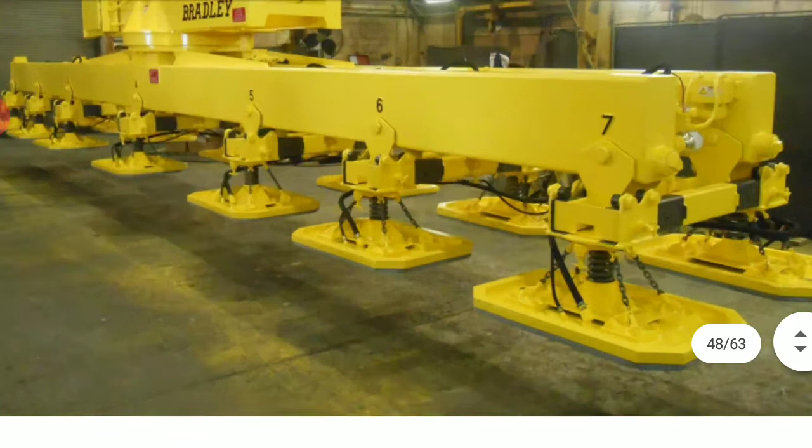So this vacuum lifting pads - these vacuum lifters are a type of lifting equipment that incorporate a vacuum as part of the lifting mechanism. They consist of, below the hook, a certain frame with a large vacuum pad. Here you can see the different pad-like systems - these particular pads come with vacuum pressures, consisting of a below-the-hook frame, including the hook part also.

And here several smaller suction cups can be seen - these suction cups are for grabbing large sheets, rolls, plates or other smooth surfaced products. This can be easily lifted up using these particular pads to the structural members. This vacuum lifting pad can be used especially in lifting structural elements.

This is part of the introduction - vacuum lift is nothing but a technique that lifts and places material with a vacuum suction head. Just by using this vacuum suction head, we can lift and place structural elements from one place to another.

This suction head is placed over a material that is to be lifted, and the vacuum pump creates a vacuum, so the material gets stuck to the vacuum head, which can then be lifted by conventional means like hoists, rams and cranes, etc.

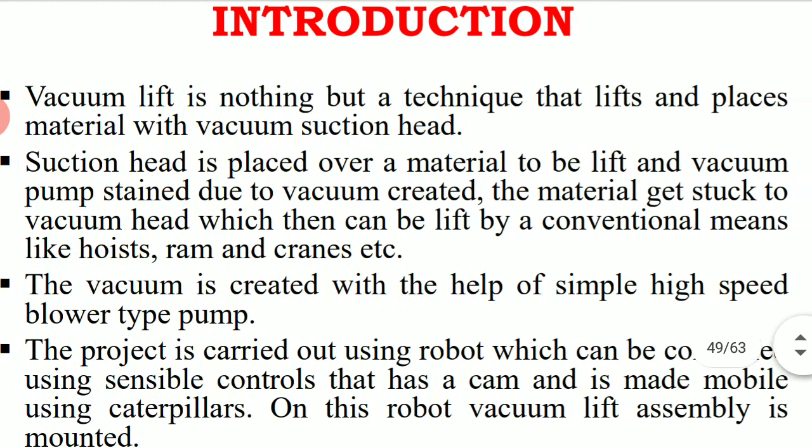The project is carried out by using a robot, which can be controlled using sensible controls, that has a cam and is made mobile using the caterpillar. Using all this, which works under a digitalization process, each and everything can be monitored just by sitting at one place. Each and every work can be done with the help of a remote system.

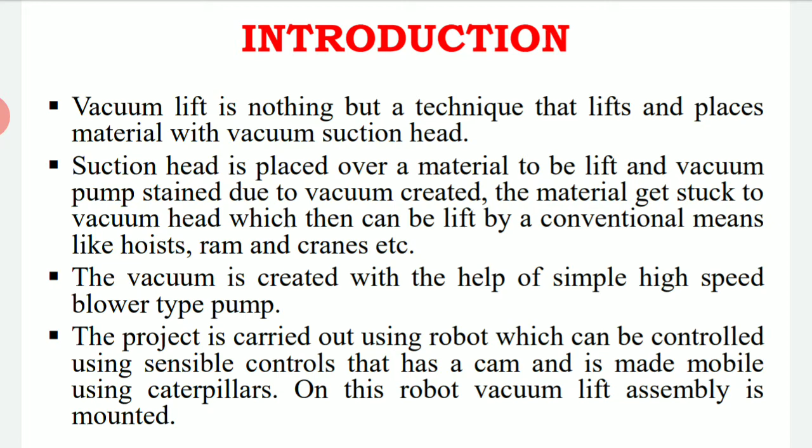What are the main uses of this vacuum lifting pad? This vacuum lifting equipment can be designed to lift, hold, turn, tilt or rotate. It has all these functions in its movement - it can lift and hold a certain element, turn it from 0 degree to 360 degree, tilt it in upward and downward motions with respect to the angle of deviation, and even rotate it from one place to another. That's the main use of this vacuum lifting equipment.

So almost anything can be handled, such as steel, glass, concrete, plastic, wood, aluminum, pipes, refrigerators, aircraft sections, drums, cartons, round shaped profiled objects - all can be handled. So many members can be handled using these vacuum lifting pads, such as steel, glass.

So basically the main limitation of this particular vacuum lifting pad is it should consist of a smooth surface, so that the entire pressure generated from that vacuum head is going to stick with that plain material, I mean plain members, so that it can easily stick to that member and it can be lifted from one place to another place.

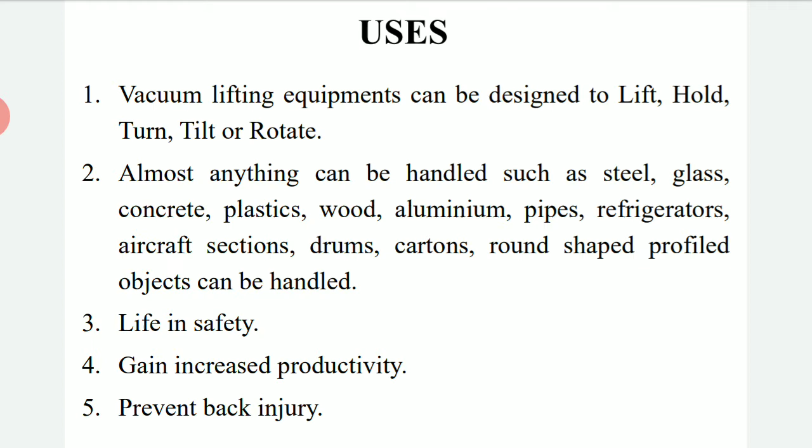And it gains increased productivity, so that work can be completed in an earlier time with a lesser amount of energy, so the productivity is always going to be increased in its section. And then it prevents back injury. So back injury in the sense that a person who is going to work that machine, that is the vacuum lifting pads, even that can prevent the back injury also.

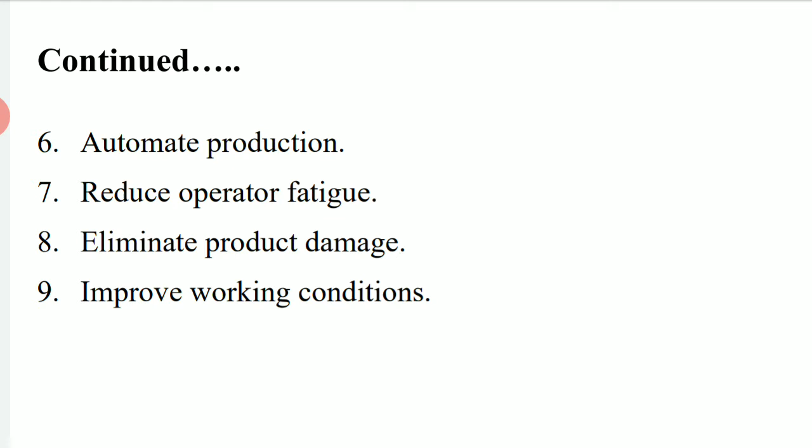And this is automated production, so everything works with a remote control system only, so no additional energy, I mean human energy, is utilized on those members, and it reduces operator fatigue. So in some cases, such as cranes, a certain operator will be there, and just by his operation modes it can be moved from one place to another place. The same thing can be minimized in the vacuum lifting system, and that eliminates product damage and it improves the working conditions. So these are the advantages.

So less ground personnel are required, reducing the risk of accidents. So here only a single person is enough to transfer from one place to another place, whereas in crane systems the operator will be there, the signalers will be there, and the riggers will be there. The signaler is going to give directions to both the crane operator as well as the riggers. So based upon his directions, the member is moved from one place to another just with the coordination between the crane operator and riggers, right. The signaler gives directions on how to erect and how to place it from one location to different locations, right.

But here in the vacuum lifting pad, only a single person is enough, so that single person can carry out this entire work, reducing the risk of accidents. And quicker pipe handling, so it can easily hold that pipe, so that the work can be continued and completed in an earlier time period.

And here there is less damage to the pipe and coating, as the only contact with the pipe is the rubber pad seal. So in some cases, if the pipe is going to be erected from one place to another, in the conventional way, that is by using cranes, the chains, I mean the cables, have to be placed, so there are chances of breakages, or the outer part of the pipe can be damaged. When we use this vacuum lifting pad, the surface remains the same, so no additional scratches will develop on the surface of these pipes.

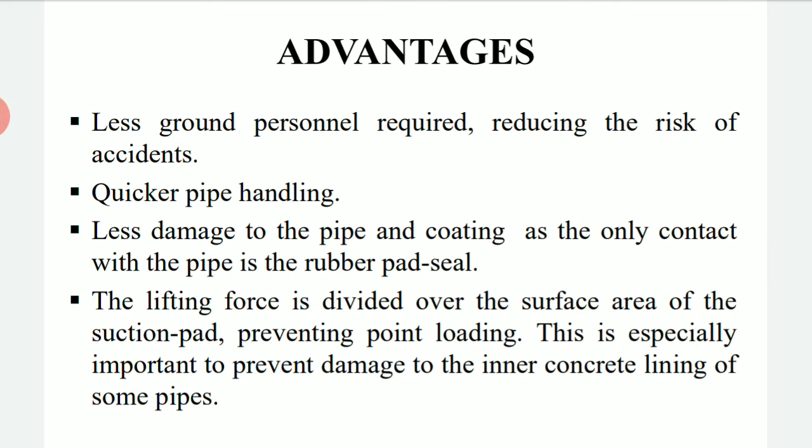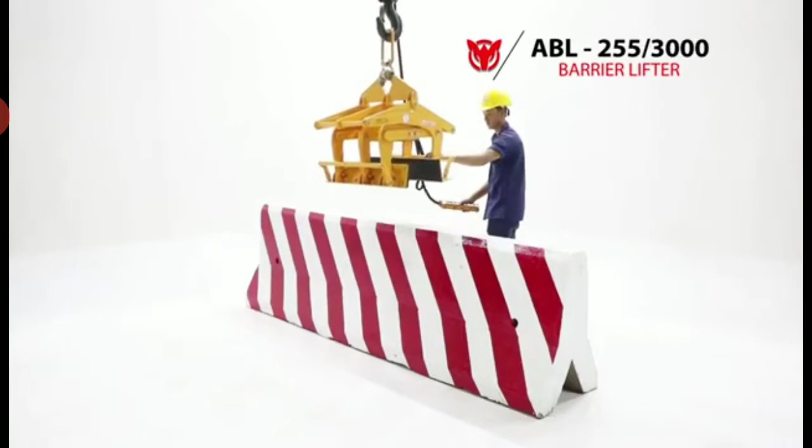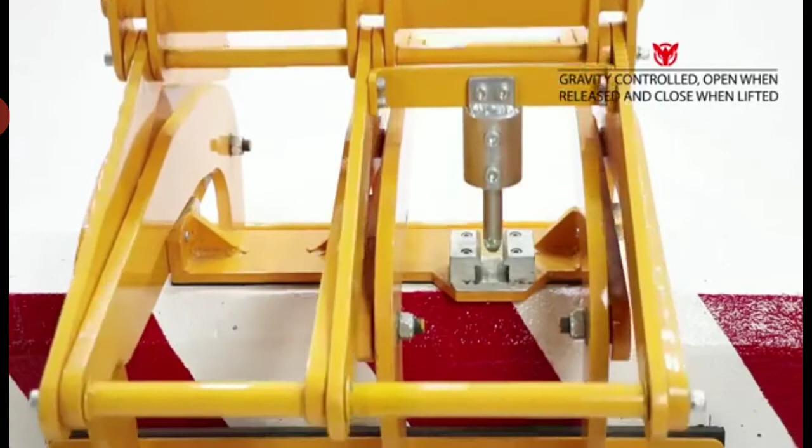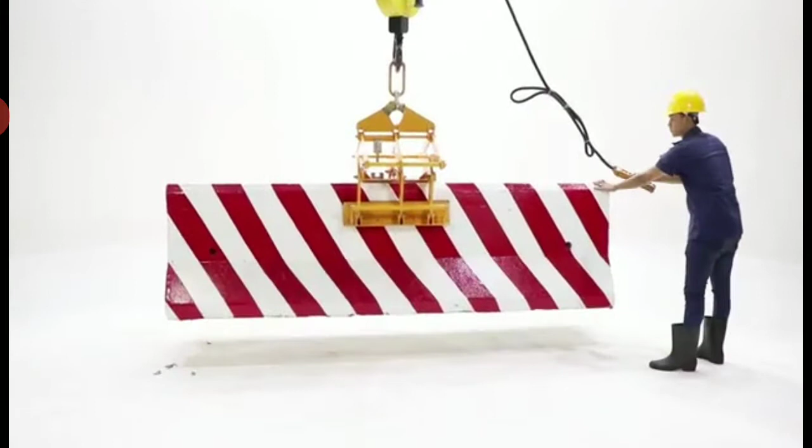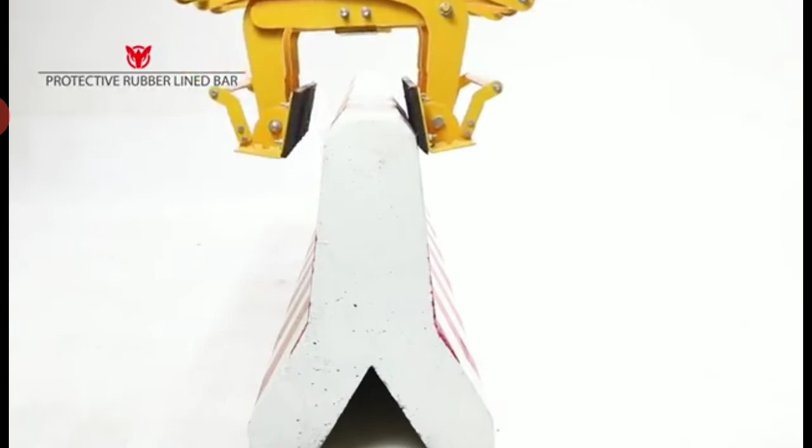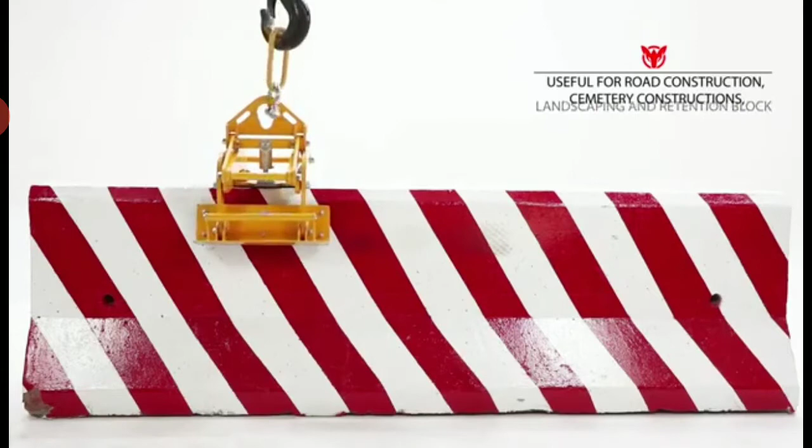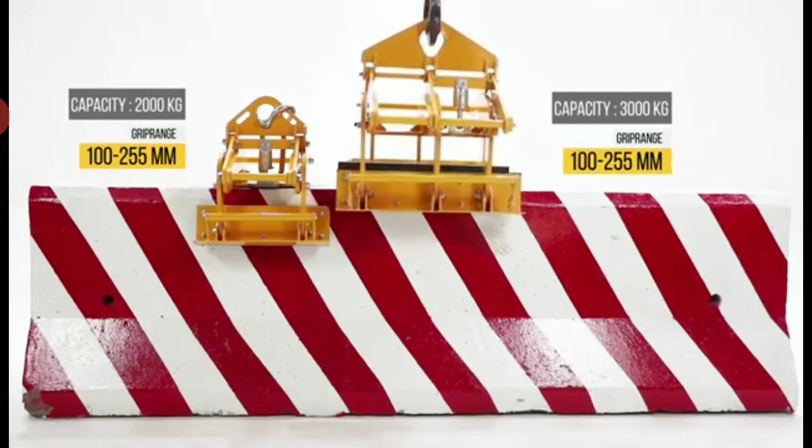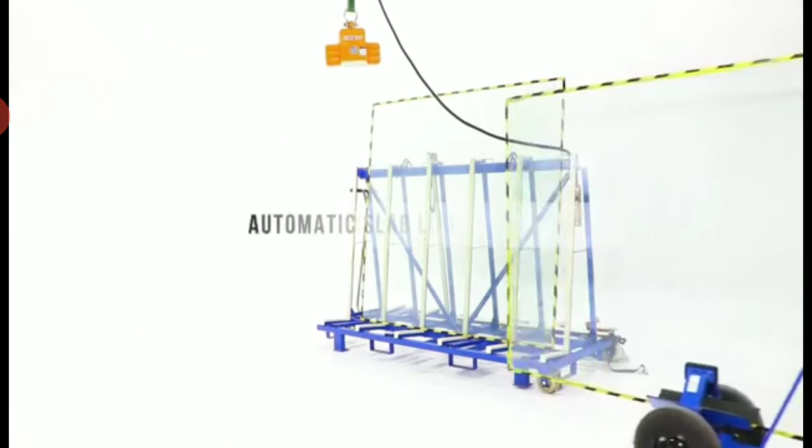So depending upon the load, we can provide the number of vacuum lifting pads; that depends upon the capacity it can work out. Okay, so in this video clip you can see the vertical members, how exactly they are going to be stored, and how exactly they are going to be moved with these vacuum lifting pads, right? So it is the automatic vacuum lifting pads, and see how exactly it is going to be moved from one place to another place just by the hand monitoring system.

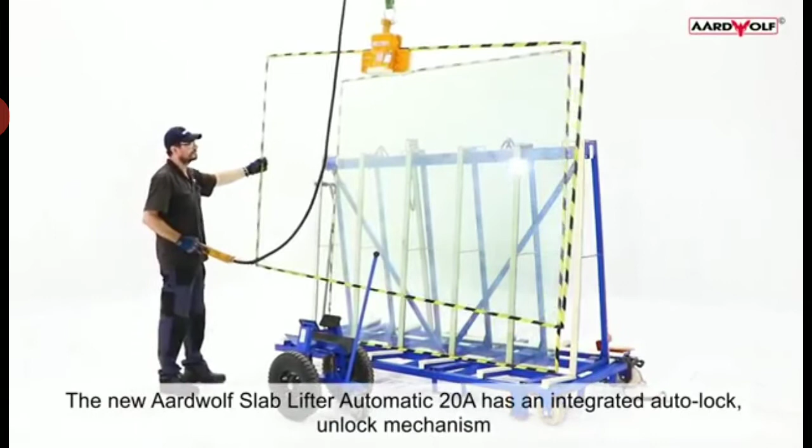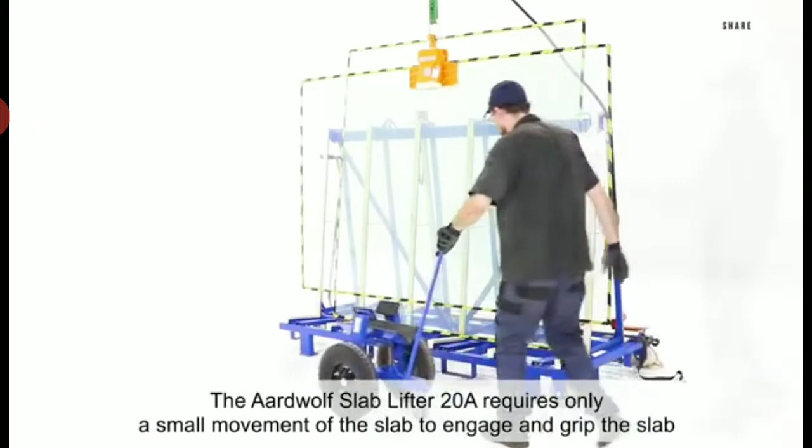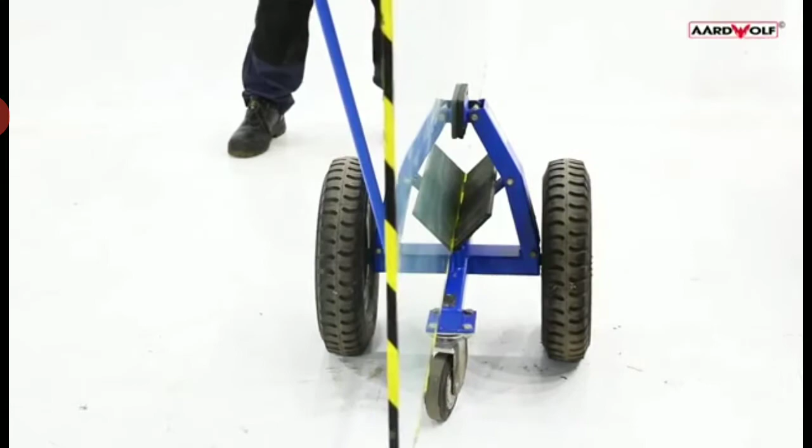Right, so everything can be done by using the controlling system, what you can see in that person's right hand, right? So just by using that controller it can be operated. So this vacuum lifting again is going to hold it, and then it can be moved from that place to the required location.

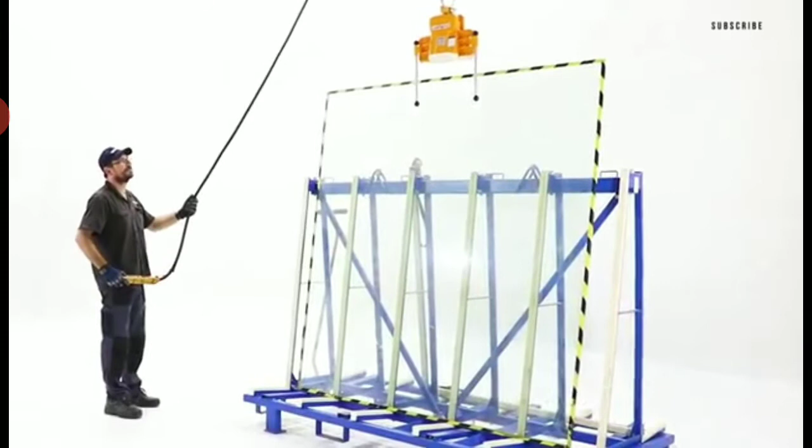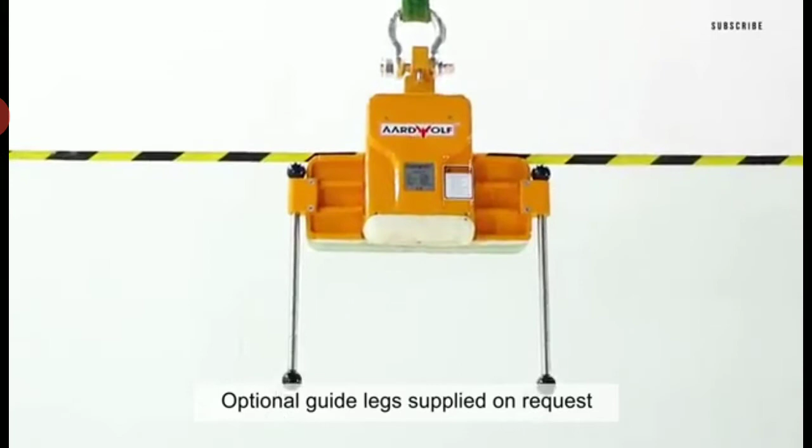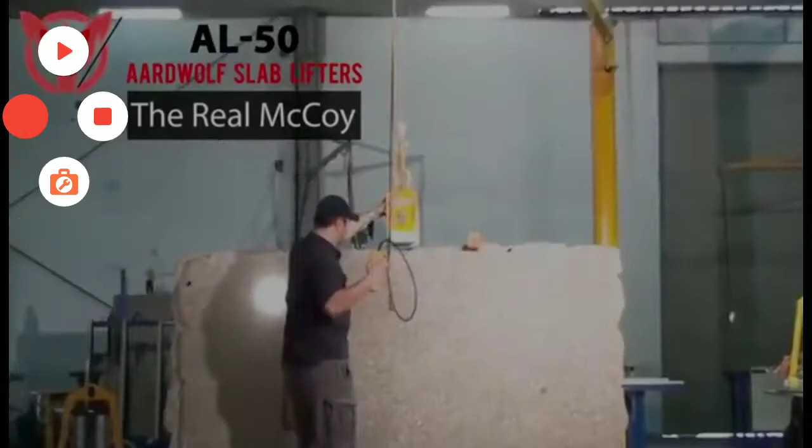So different holding systems are there, so these types also can be used, right? So these optional guide legs are supplied depending upon the request. If the length of the member is more, and if it requires more safety, then also we can provide these types of system. So this is one more video clip showing how exactly they are going to erect these members or any materials from one place to the required location.

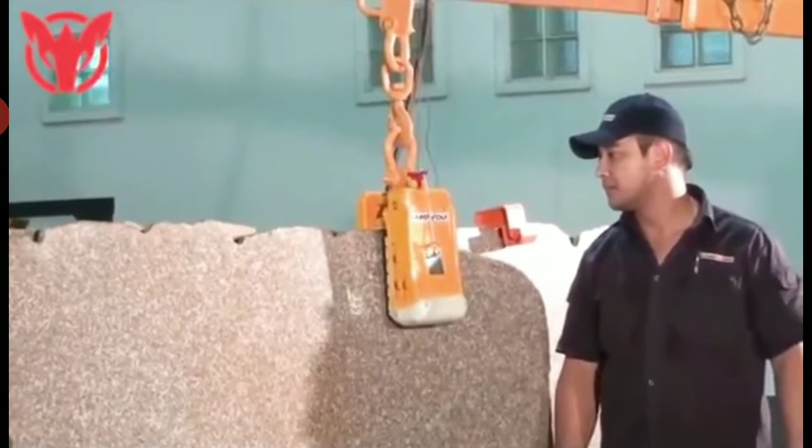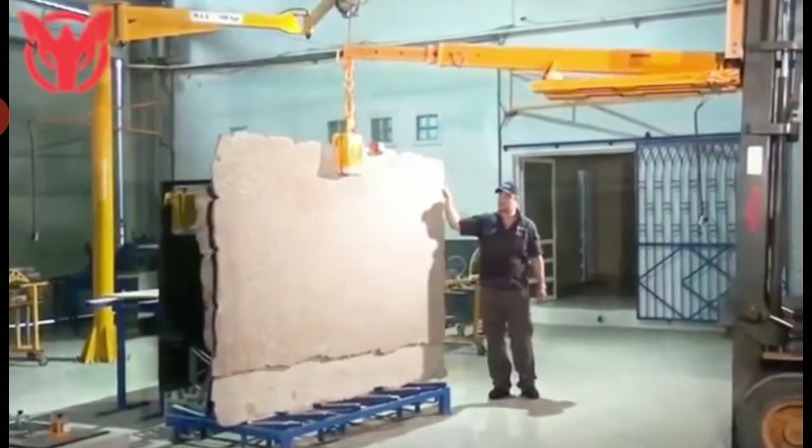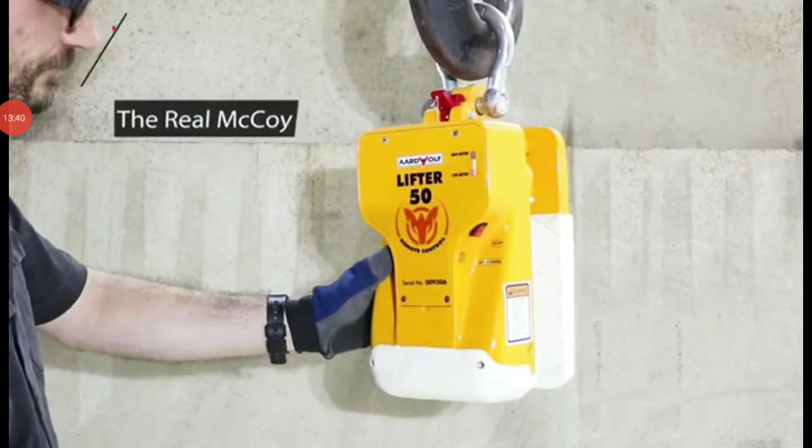So that depends upon this vacuum lifting pad, so whatever the pressure which will get released from these pads, it is going to hold up that material, and then by that energy it can easily lift. So here also you can see how they are going to provide these vacuum lifting pads to these members, and how exactly it is going to hold those members.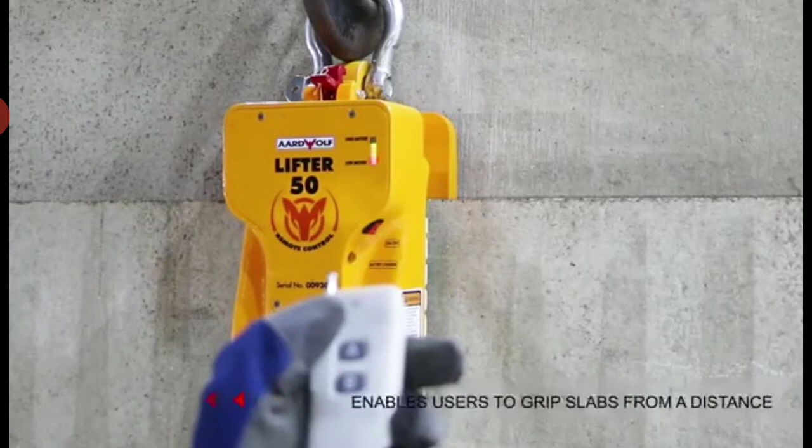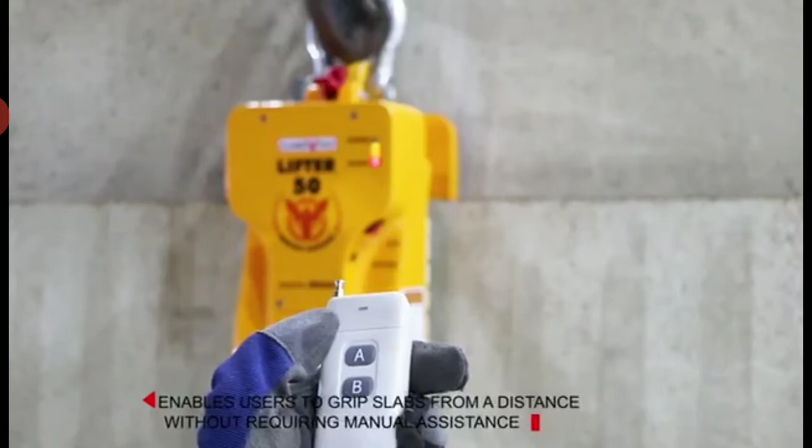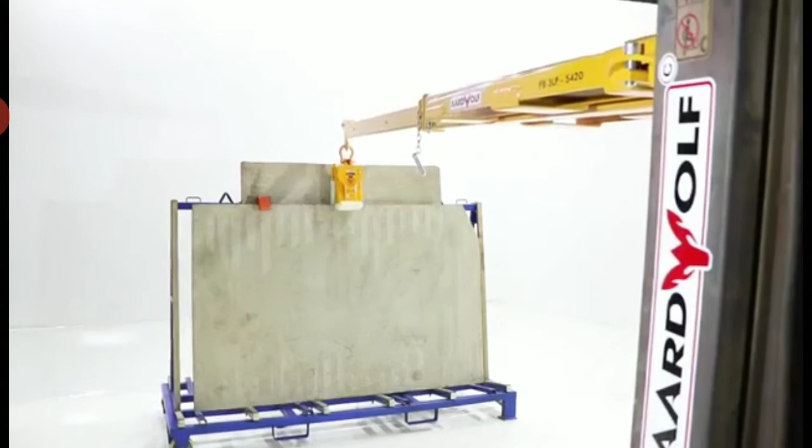So first we need to enable users to grip the slabs from a distance without requiring manual assistance. So it will be very helpful in the construction field, so that no additional energy is needed, and even the chances of damages can be less by using these types of techniques.

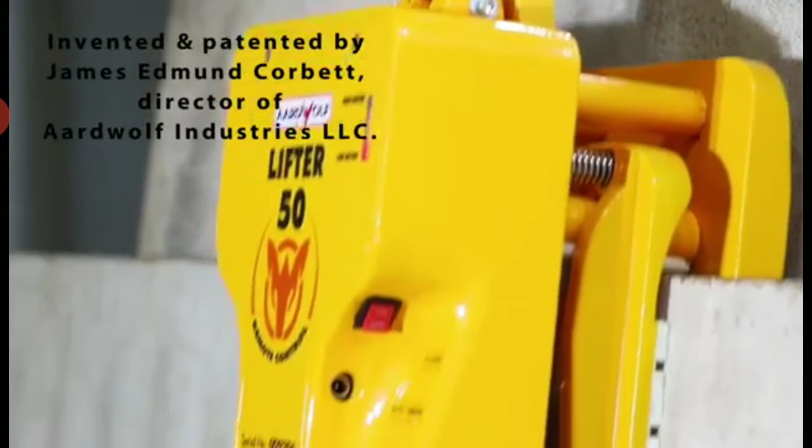Okay, these A and B buttons are just to lift up and hold that particular member by using this lifting pad, right? And this particular video belongs to this invention, and this is patented by James Edmund Corbett. He is a director of Aardwolf Industries LLC.

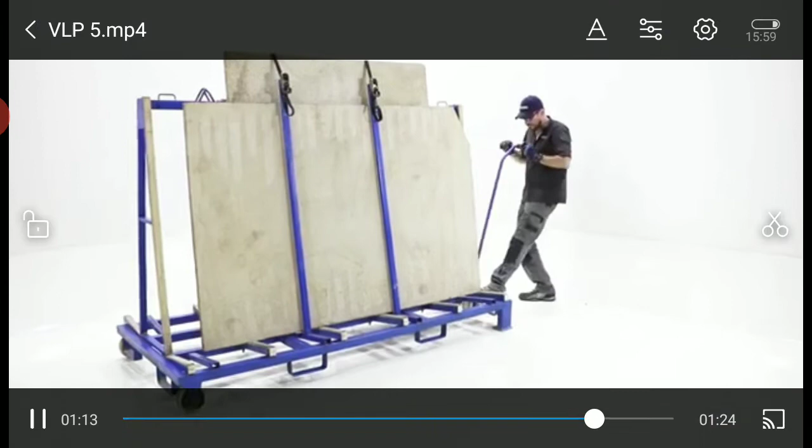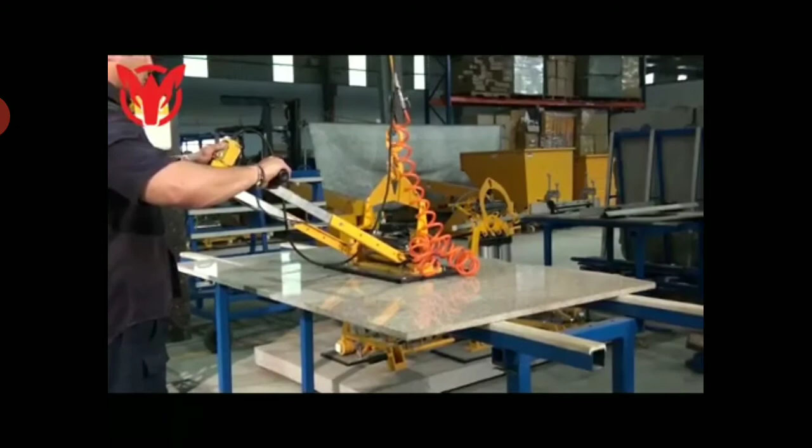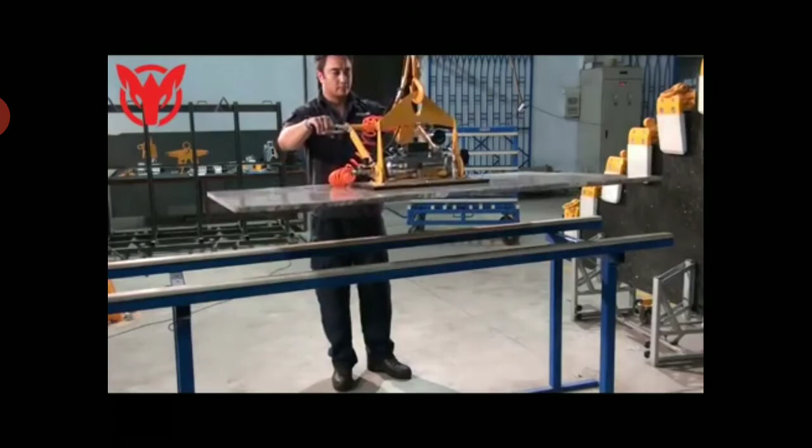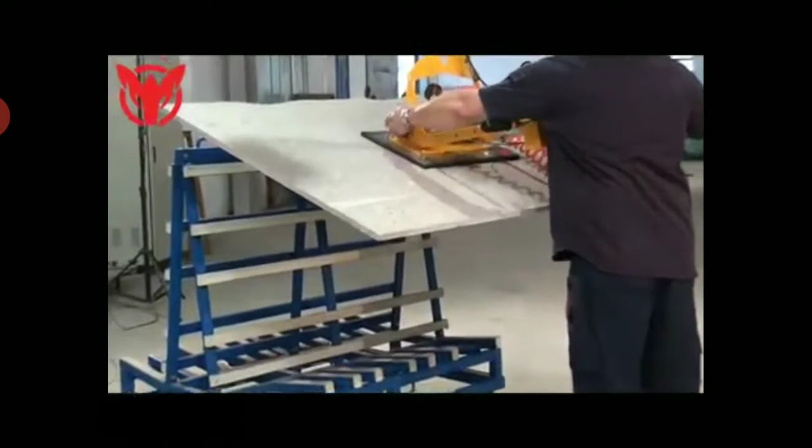See, it can even lift up the tile material, right? So see how easily he can lift up that element just by using these vacuum lifting pads. Right, so no additional energy is required. Just by that hand movement, it is going to lift that material from one place to the required location. So it can be used in any direction. It can be tilted, it can be rotated, and it can be moved from top to bottom. So later you can release that pressure, which is going to be released.

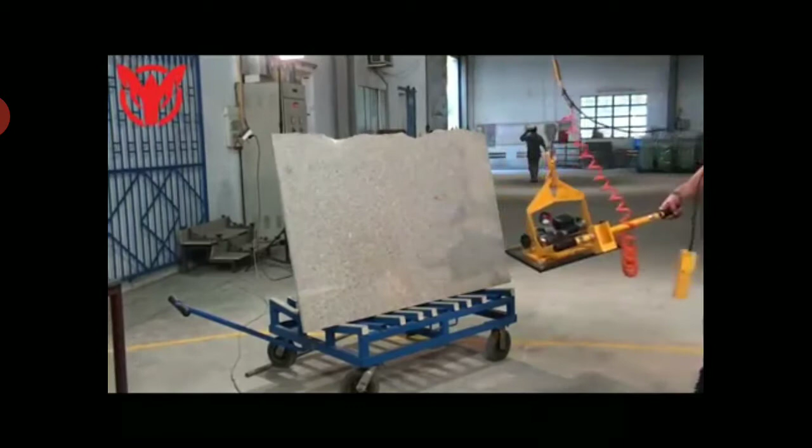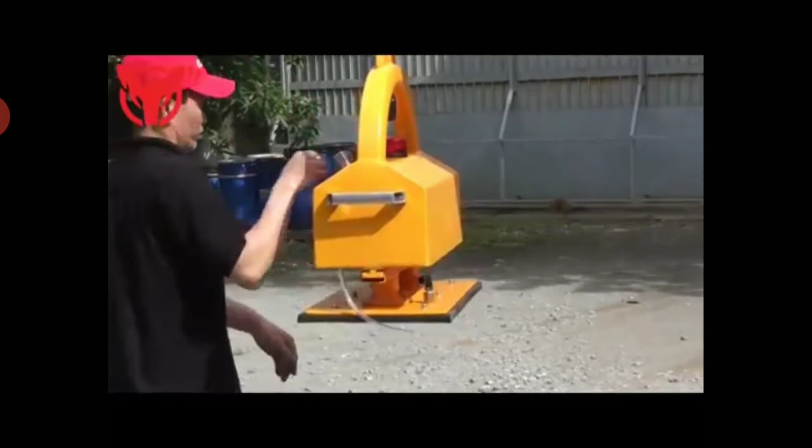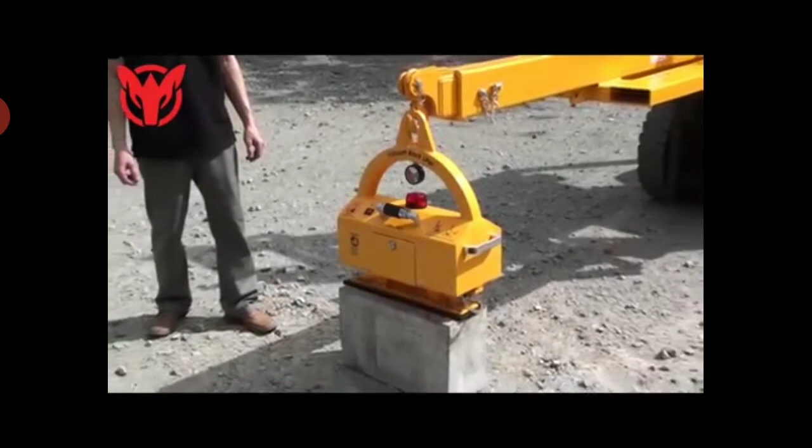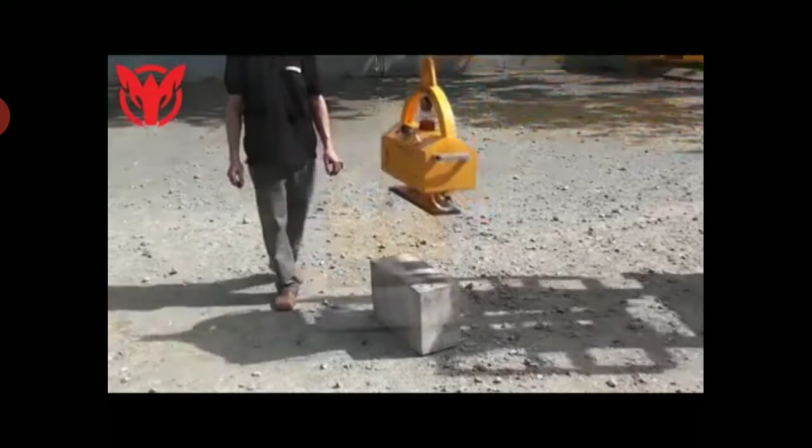So in this video clip you can see even the smaller prefabricated elements, such as the concrete blocks, can also be lifted by using this vacuum lifting pad. You can see the different types of pads that can be used for the different members. See how easily it is going to be lifted from the ground portion to the top portion by using that vacuum lifting pad. So like that, these types of vacuum lifting pads have been used in the construction process, especially to lift heavier materials from one place to another place. Right, so how easily it can be worked out.

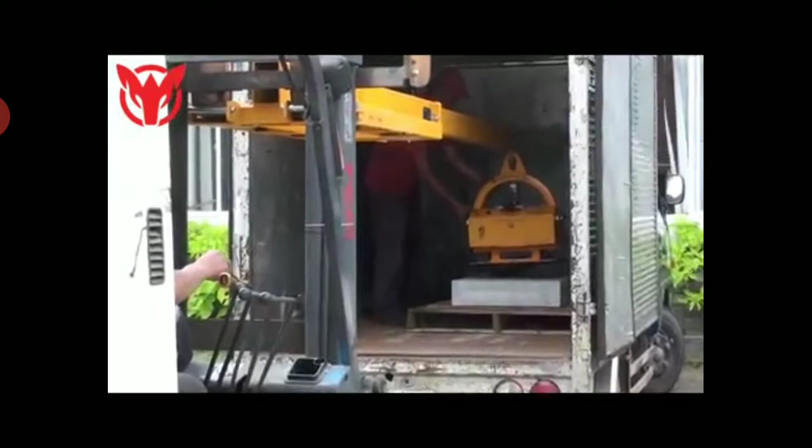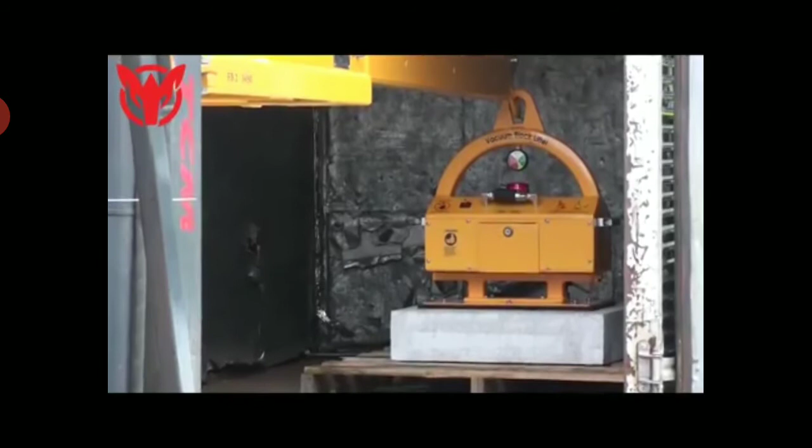So even to unload the materials from the transportation vehicles, these vacuum lifting pads can also be used. So no additional damages take place compared to whenever we move it by a manual energy source.

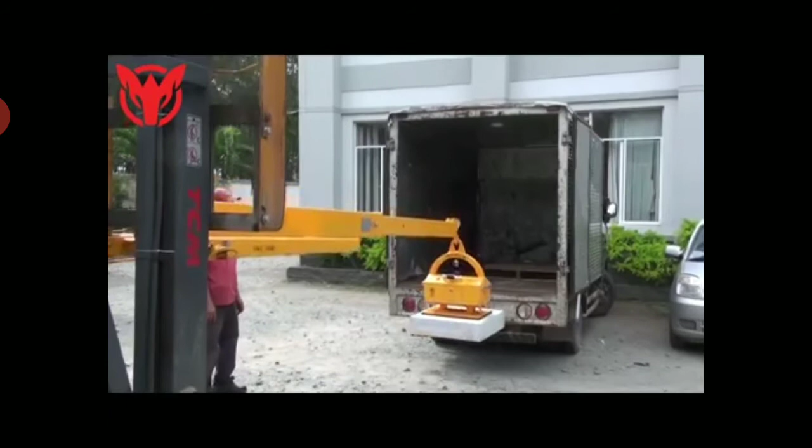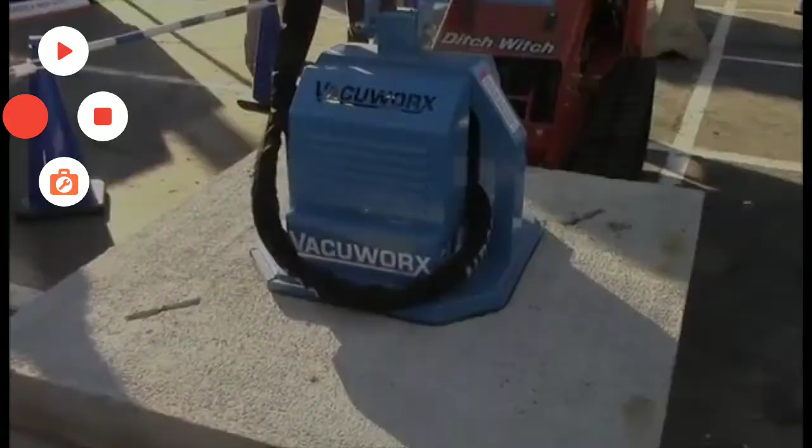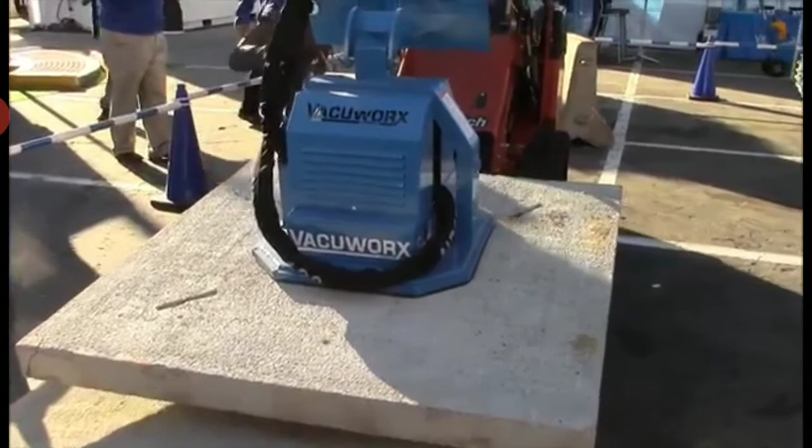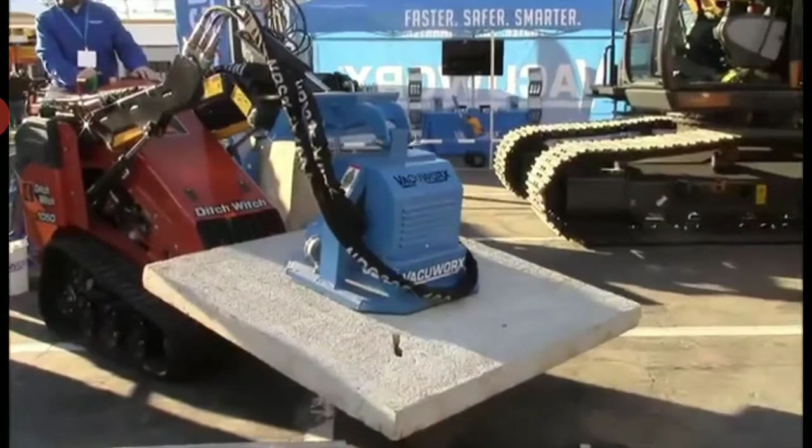So here you can see how the structural members also can be moved by using these vacuum lifting pads. So it requires less manual energy by the laborers. Even the chances of accidents can be minimized, and the chances of breakages also can be minimized. So that is the main advantage of this vacuum lifting equipment.

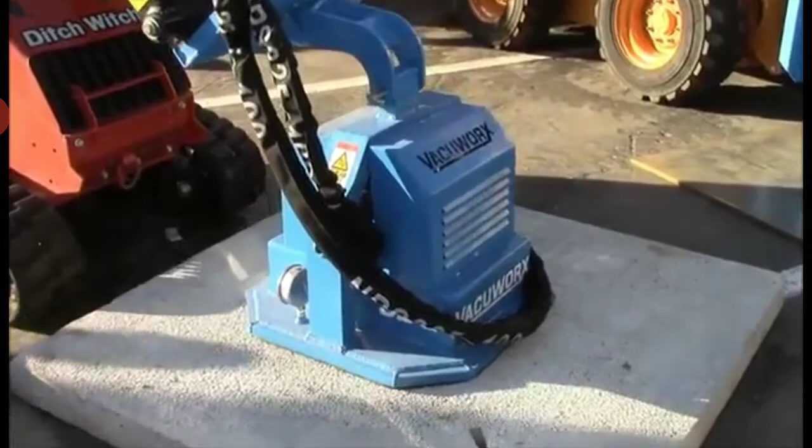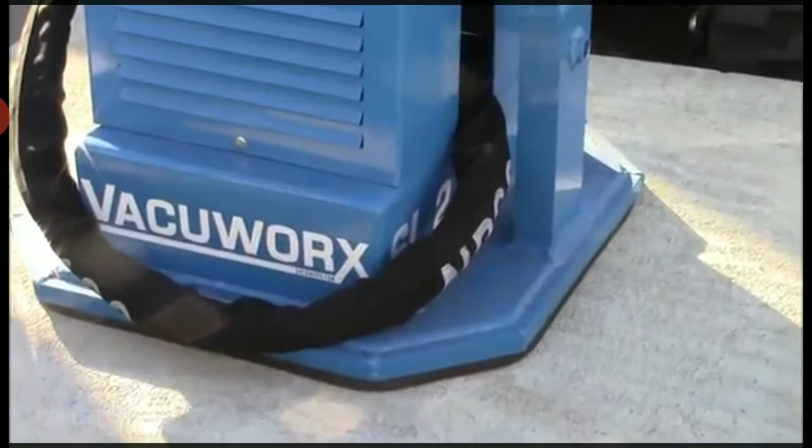See how, by using the rubber gaskets, it is going to hold that particular member, so that the pressure holds the member to lift it from one place to another.

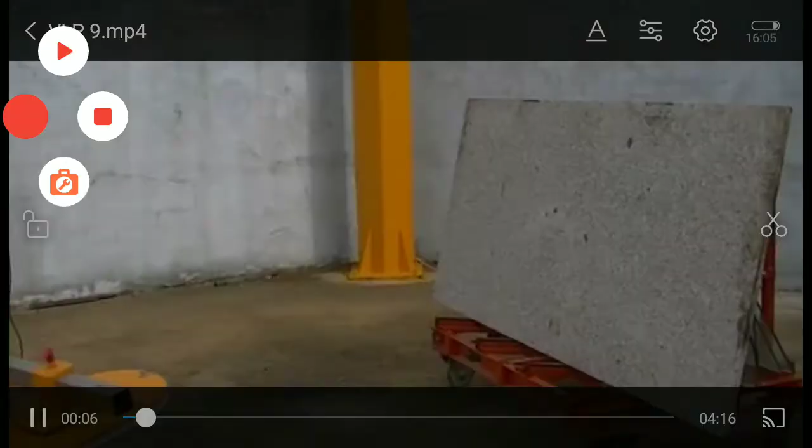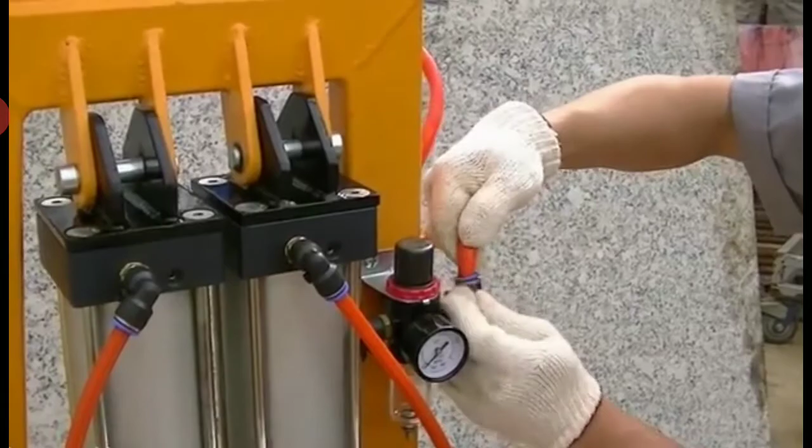See how exactly the pads are attached to the member, and by using these pipes the vacuum pressure is released, and these are the hooks to hold the vacuum lifting pads, so that by these movements it is released, and then these pads are attached on the structural member.

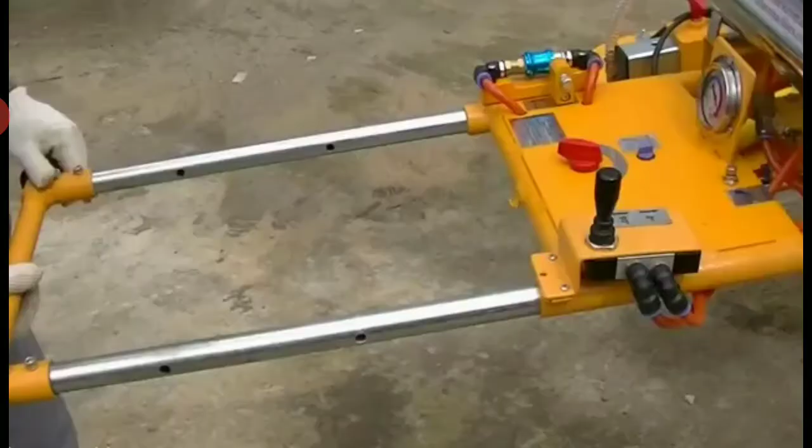So these pads are adjustable, I mean they are movable on this particular stand, so that wherever they are required these lifting pads can be fixed, right? So they can be positioned at different locations. And even the moving handle can be convenient, depending upon the operator.

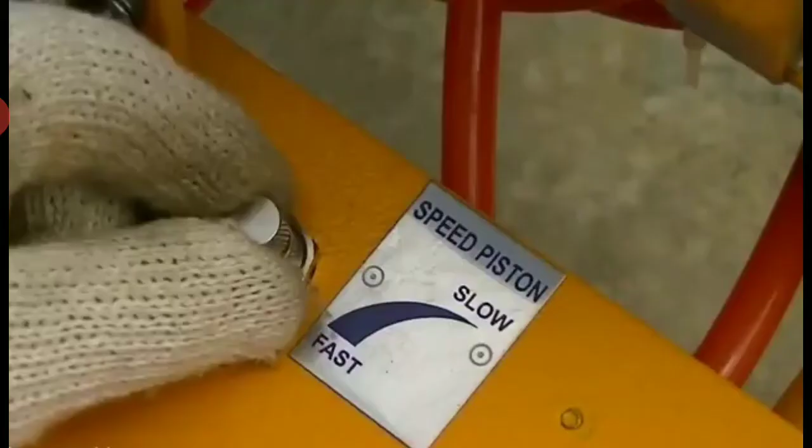So it can be adjustable, and here is the operating system, where the pressure level can vary with respect to the requirement. The speed should be moderate, so that it does not move fast and create any nuisance with damages.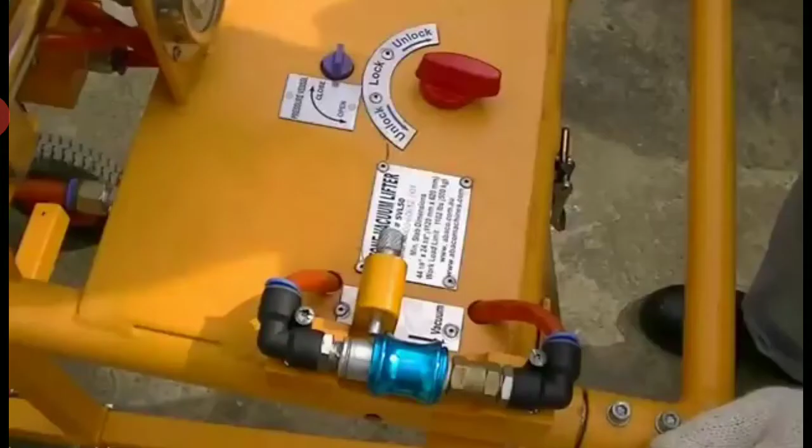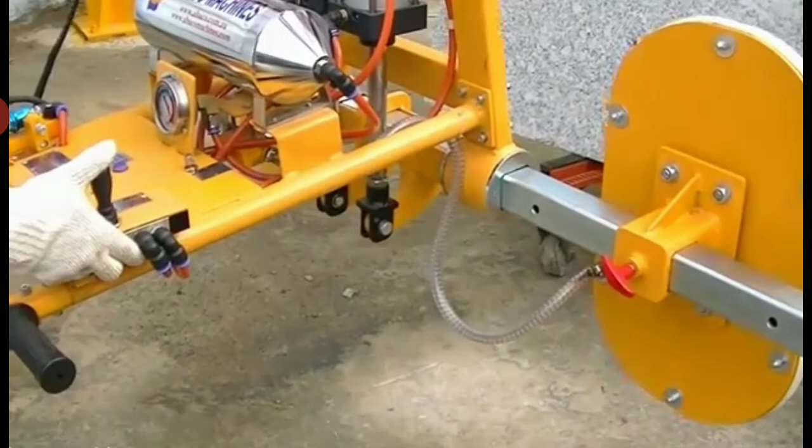This is the vacuum head, which moves the pads from 0 degrees to 90 degrees. So you can see the demo here, how exactly it can be moved from 0 degrees to 90 degrees, right? So it can be operated in such a way, right? You can see there.

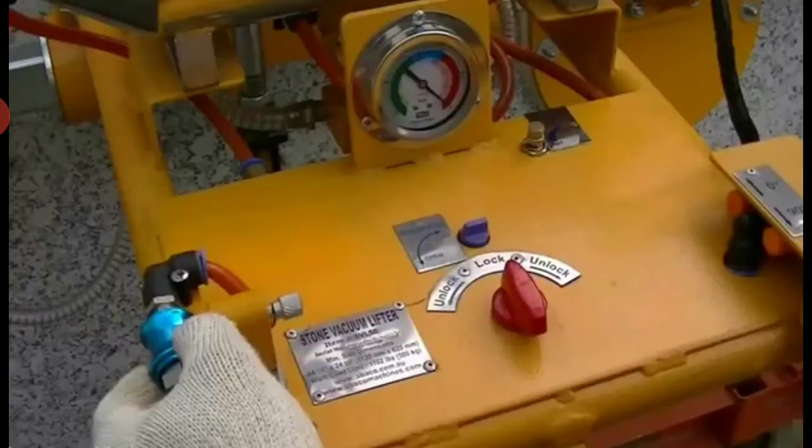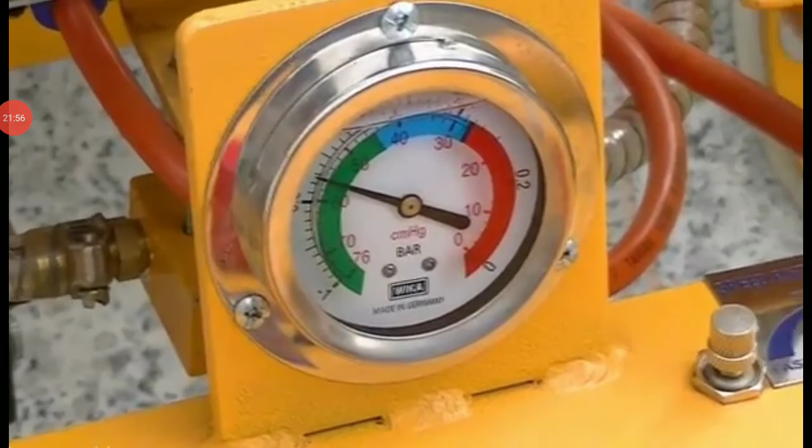So now, as per the given inclination, it holds up the members, and then the pressure is generated, and that pressure holds the element, and then it can be lifted up. See how exactly it can be moved from one place to another place.

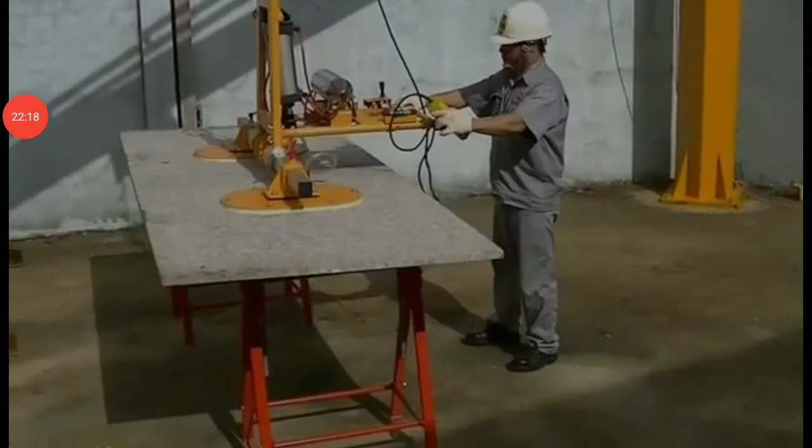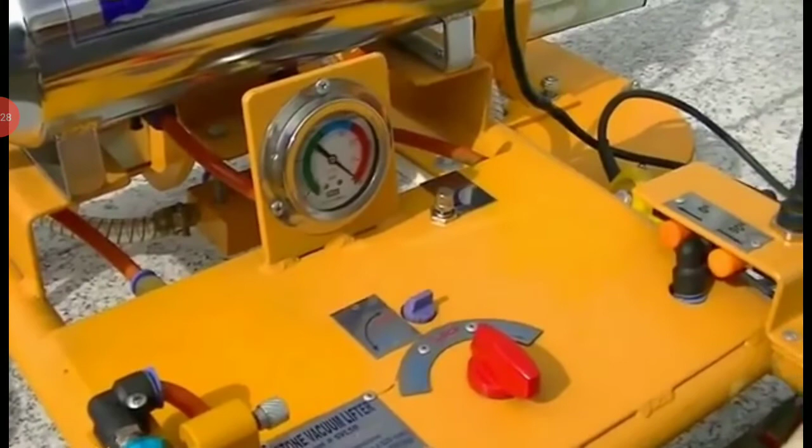See, easily it can be turned, easily it can be tilted, and easily it can be rotated, and it can be used however we require, right? So again the pressure has to be moderate, and depending upon the requirement we can provide the pressure in the members with the lifting pads.

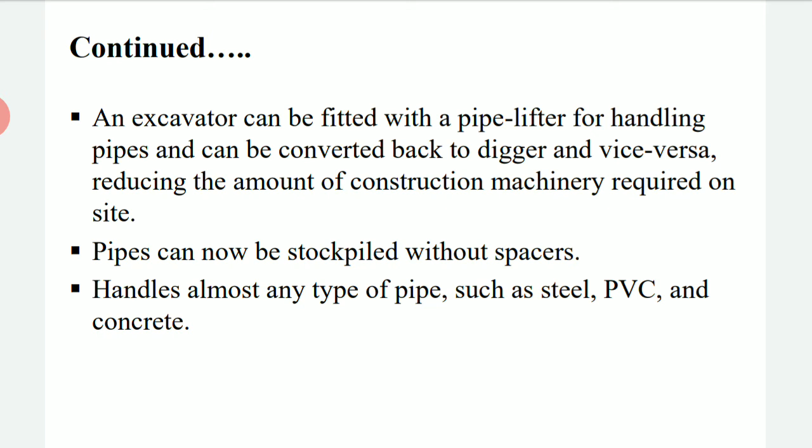And here the advantages continue: an excavator can be fitted with a pipe lifter for handling the pipes, and can be converted back to a digger, and vice versa. The top layer of the pipe can be damaged just by using cables, or the chain and pulley system in the erection part. And the pipes can now be stockpiled without any spacers, right? And it handles almost any type of pipe, such as steel, PVC, and even concrete pipes.

And the main disadvantage is that the initial investment of this vacuum lifting pad is high, but when it is used in a large project, it directly reduces the wastage cost, and it will be useful. So the initial purchasing cost will be more for this vacuum lifting pad, and it requires a vacuum pad suited to the thing which is to be lifted.

So no other lifting pads can be used; different lifting pads are available, but they can't replace the original one. So the same company's same size of vacuum lifting pads have to be used, which makes it difficult to replace one lifting pad with another.

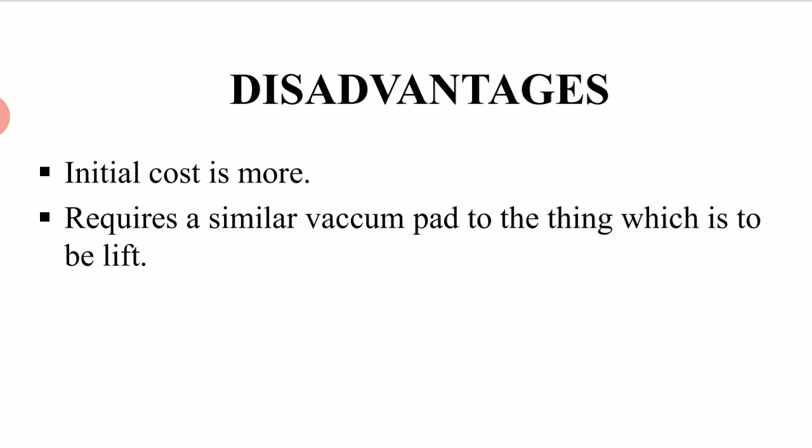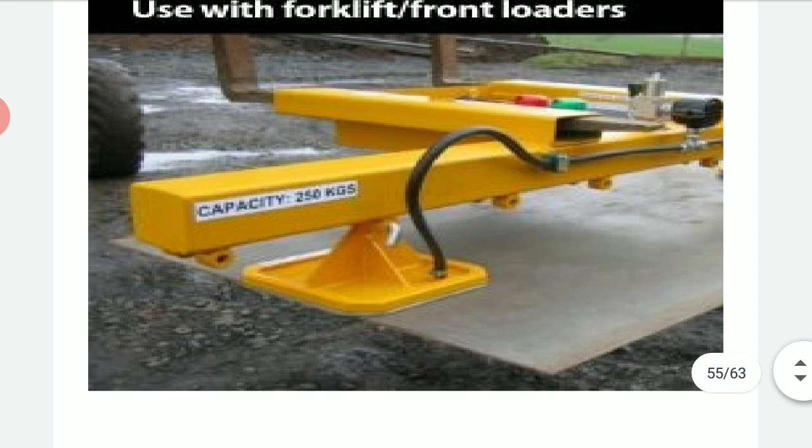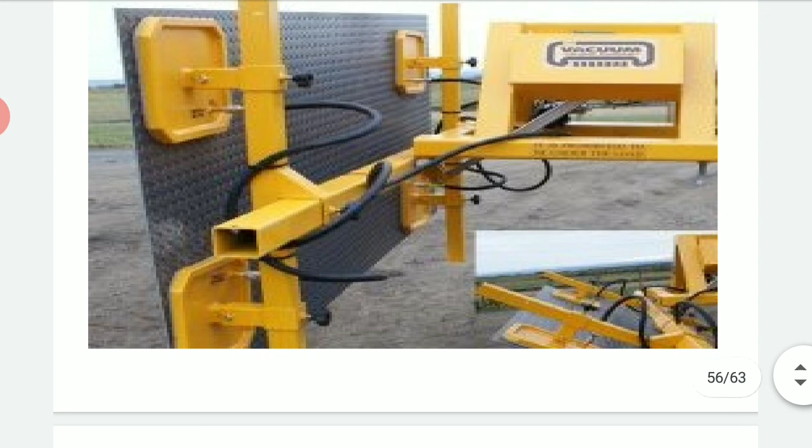Here you can see its use with forklifts or front loaders. So how exactly it is going to work, right? So this is for vertical members, how it is going to hold the structural element, right? So this is about the vacuum lifting pad.